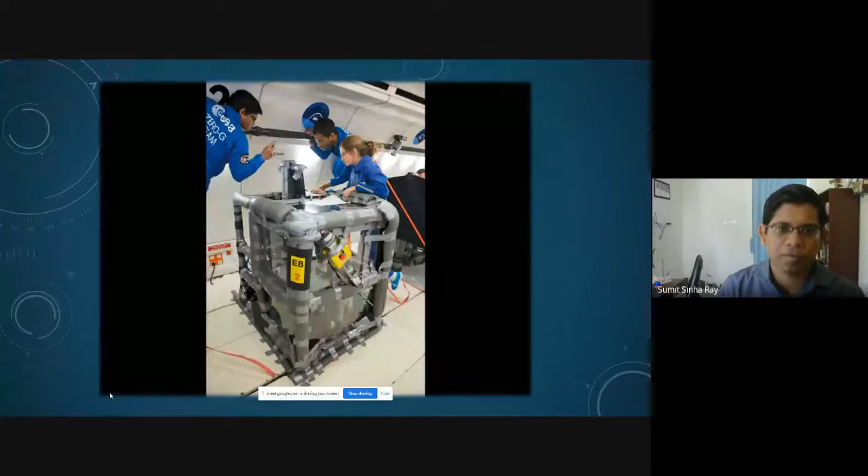So what happened on that day? Why are these people jumping in joy? Maybe some of their experiments were successful, some not. So I would like to take you quickly to that day, and slowly we'll build up on it. If I have to show it in a video, this is what happened. Nerds standing in front of an instrument flying, as you can see, a giant big instrument, a 0G flight, and me wearing a jumpsuit. But wait a second, how did that happen? Let me take you back to the flashback.

This is what a 0G parabolic flight actually looks like. It's not real 0G, it's about 1.8 microgravity, and before that you have hypergravity of 1.8 G. A plane like this Airbus A310 flies straight for several kilometers at 820 km per hour at 6,000 meters, then goes up for about 20 seconds with a 50-degree nose up, reaching about 8,000 meters, and at about 685 km per hour they reduce their acceleration and reach weightlessness, or 1.8 microgravity. For about 22 seconds they stay like that, and they come down at 1.8 G once again.

So for about 20 seconds, you will feel almost double your weight. If you try to walk, it will be very difficult. You won't be able to take a proper step, and you would feel your heart pumping hard to push blood all the way to your brain. Then for about 22 seconds, you will feel weightless. You will fly around, do all the different things you want to do, and then right away you will be kicked into hypergravity again. Then there will be a flat flight in one gravity for a few seconds.

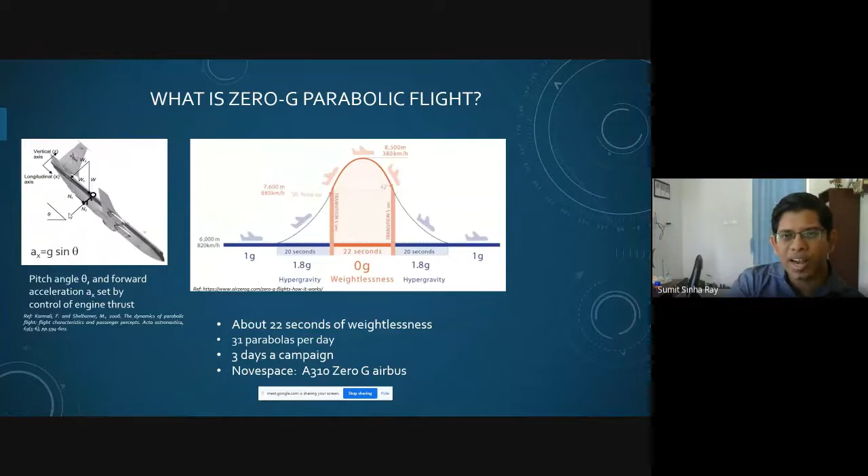And luckily for me, that was the day when most of the data were actually collected in our experiment. Well, if I have to think about what the physics is, I'll leave it up to the students of this esteemed department to calculate from this problem, which is shown on the left. Now, if I have to show you what it actually feels like in this entire parabola, I have a small video for that. So this is what is happening at 2 gravity or 1.8 gravity.

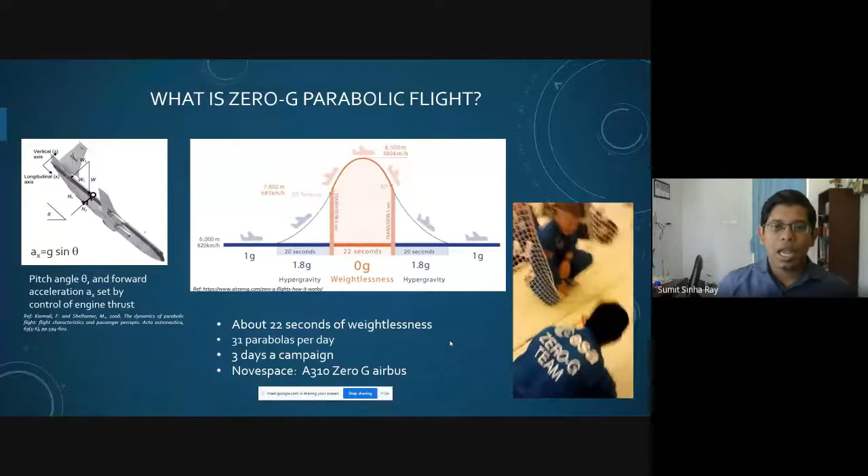So this guy Vladimir, he's now a part of ISS. I used to weigh like 90 kg then, but for me, the difficulty was that I was trying to push about 100 kg up. So this is where I am right now. So this is like the last. I am done, and then again it came to 0 gravity, and I just flew up. I wasn't there anymore. I could not control my body. So this is how it actually felt.

Now, when you are already inside, you don't feel like doing experiments, but we were bound to do experiments. We spent more than 100,000 euros for just these 3 days of experimentation, so we had to do some experiments. I will come to that. The question is, why do we need these flights? Apart from fun like this, there are many Hollywood TV serials that have availed these flights, and a lot of movies. So apart from recreational purposes, these 0 gravity flights have much to offer, because they are the practice ground. They are the tutorials for all these astronauts.

They go up to ISS, and when they go to ISS they have to stay weightless all the time, so they have to be trained in a simulated condition like that. One condition is them working inside a pool of water, so that they can strengthen their muscles and get the sense of time, etc. But to actually feel weightlessness, they can either go to a drop tower or they can use these flights. These flights give much more time than a drop tower, and hence they prefer these.

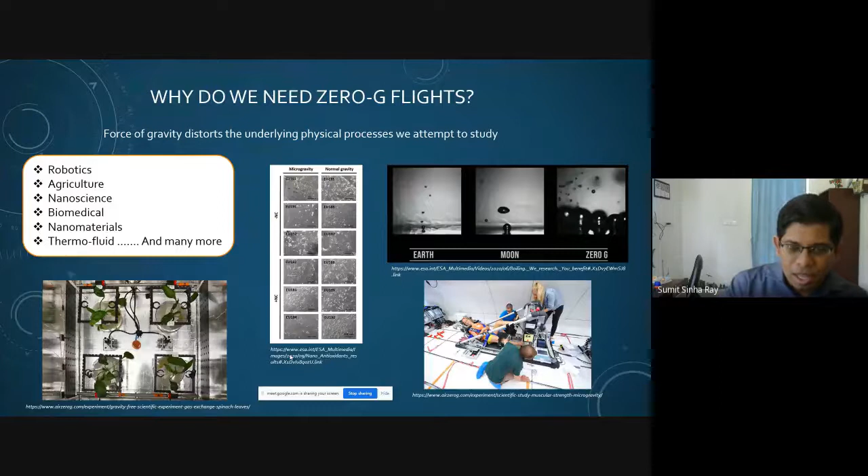Well, so now if I have to talk about the D-Day, what happened on that day. So now I give you the prelude of why we wanted to study in a parabolic flight. The basics is that my advisor, Professor Alexander Yarin, had a project from NASA, and he wanted to study the effect of nanotextured surface for enhancement of boiling heat transfer. And he had a partner from TU Darmstadt. His name was Professor Cameron Tropea, along with Peter Stephan. So they cooked up a project, and they somehow managed to get into this European Space Agency parabolic flight.

So in the month of March, when I was preparing these nanotextured surfaces, my brother, Dr. Suman Sinha Ray, who was also in this lab at the time, he was running the heat transfer experiments, and he knew what was going to happen. Somehow I had no idea. I was mostly invested in developing the surface, which can actually help in maximum heat transfer. I got a call from my advisor. I went to his office. Suman was there, and he suddenly, in his heavy Russian accent, told me, "Sumit, you are going to Germany and then France, and you are going to zero gravity flight."

And I was shell shocked. I was stunned, and I was happy, elated, everything, but had a lot of fear, because I was just 1 year then in that lab. Within a year, getting that kind of opportunity was huge for me. I gladly accepted it, managed a visa, flew to Darmstadt, spent there a couple of days perfecting the instrument, and then drove about 1,200 kilometers to Bordeaux. It's a heritage city in France, and we were there for about 10 days, 7 days of pre-experimentation and 3 days of experiments.

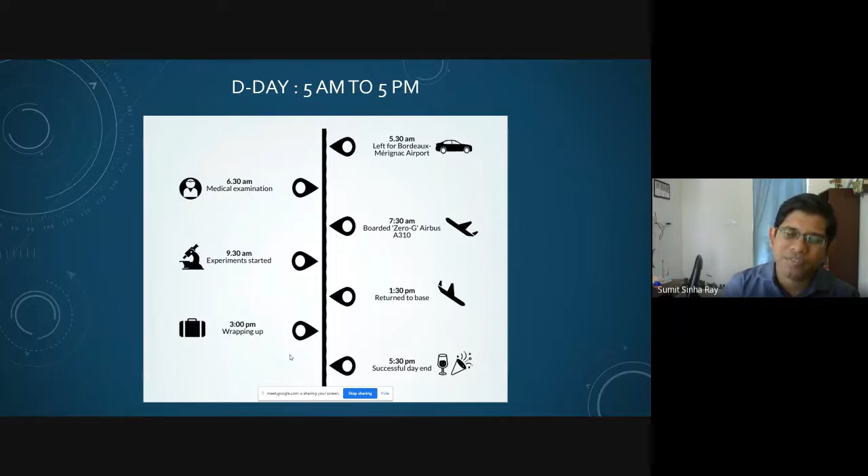At about 1:30 to 2 p.m., we came back. By that time, due to over-chewing a couple of chewing gums, my jaws were hurting badly. But then one of the German guys gave me a French baguette. And a French baguette is the kind of bread you can take into a sketchy neighborhood and beat anyone up with. So it took me about an hour and a half to chew on that baguette and finish it.

After that, it took about an hour to wrap up everything. And by 5:30, we were back at our villa in the Bordeaux main area, and we partied hard. Well, we got the maximum data on that day, and this was our day. And we were really happy because out of the 12 groups there, only 2 could publish their data, and most of the data came on that day.

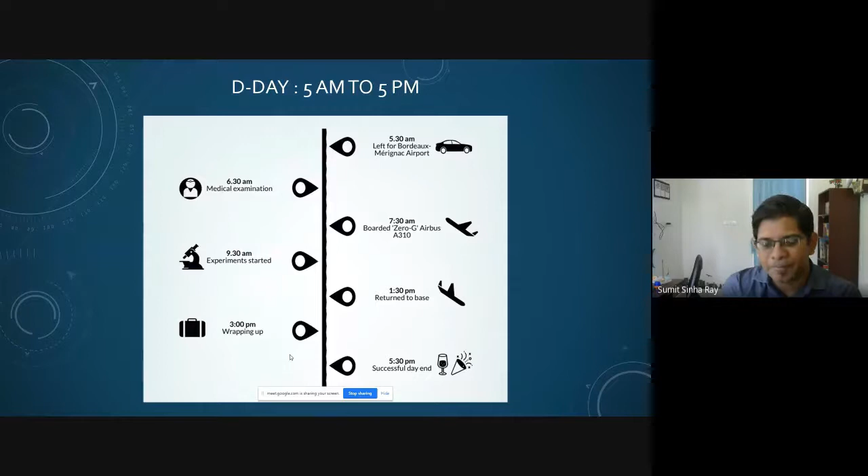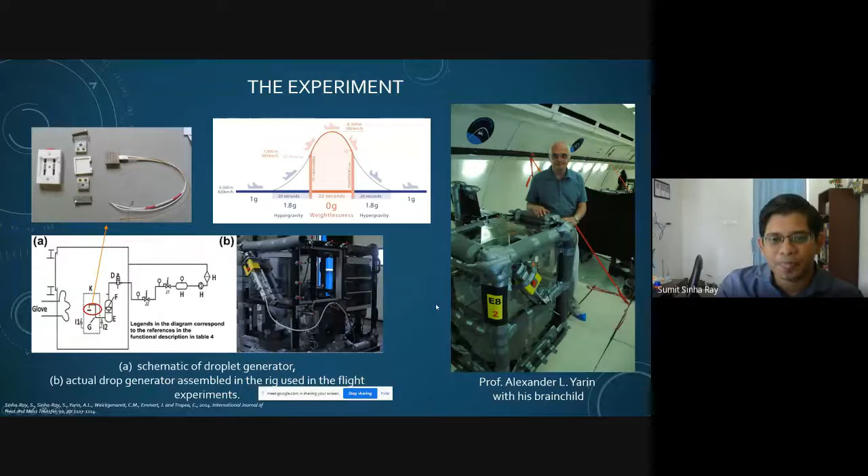So this is what happened during the experiment. So these are small videos. There were a lot of decision makings that happened during the experimentation, and there was one small funny weird thing that happened, and you may end up laughing at the end as well. So this was one incident.

So in the background, as I run this video, if you're able to hear, what happened when you are getting into this 1.8 gravity, they say pull up. So that means they are going up now, and then they will say 30, 40, and then injection. That means that goes into this zero gravity, and then they will say pull out. That means now they are pulling out from the parabolic, the zero gravity area, and then twice gravity starts again. And you could see immediately people reacting to that.

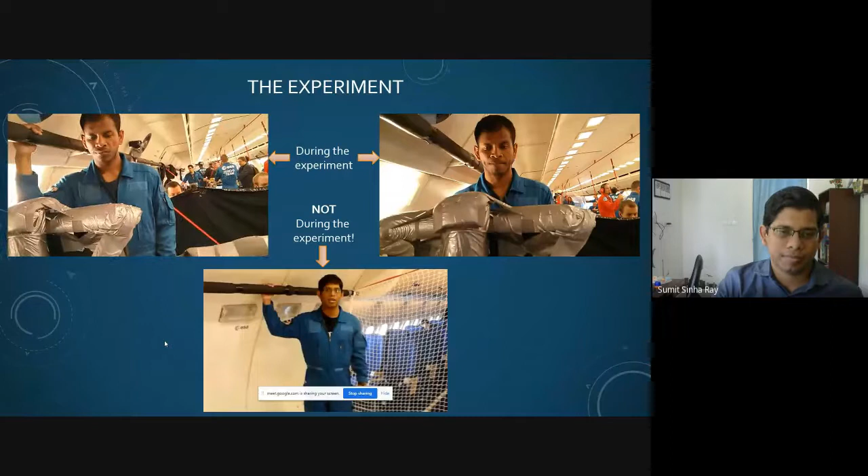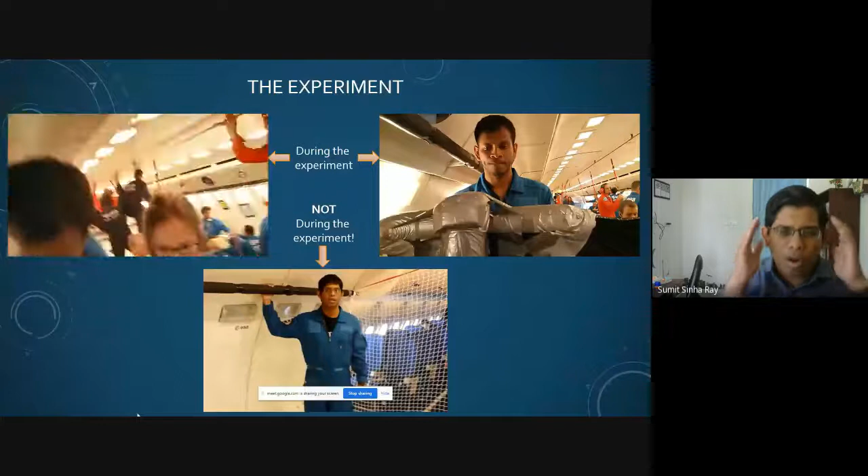So he said pull up. Now you will hear 40 and 30. And you heard injection, and you hear this hissing sound at the back. Everybody is flying right now. So now the decision making is when to turn on the compressor, when to generate that drop, at what frames we should be choosing to understand that. Now you hear in the back 30, 40, and then pull out.

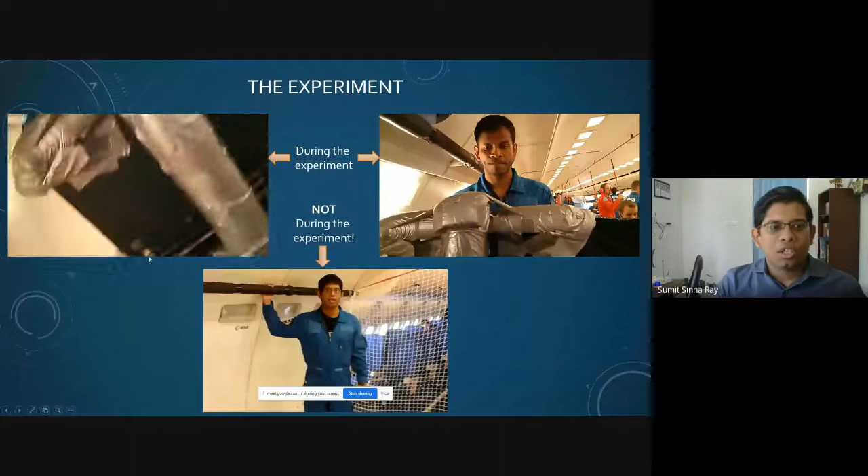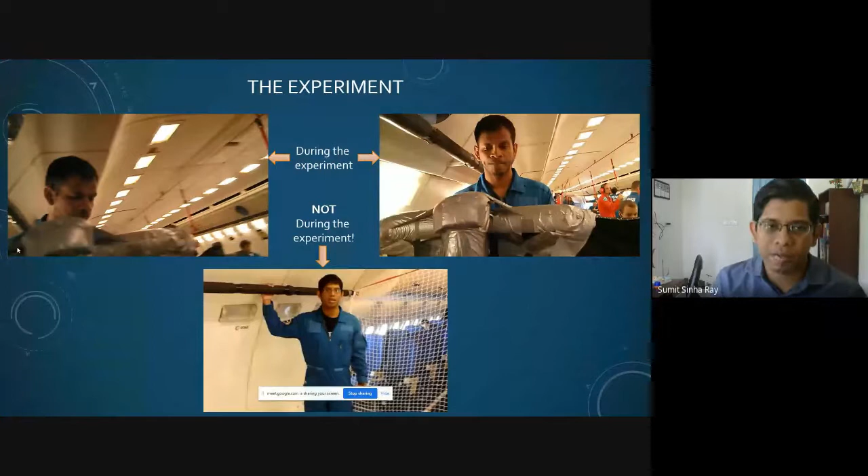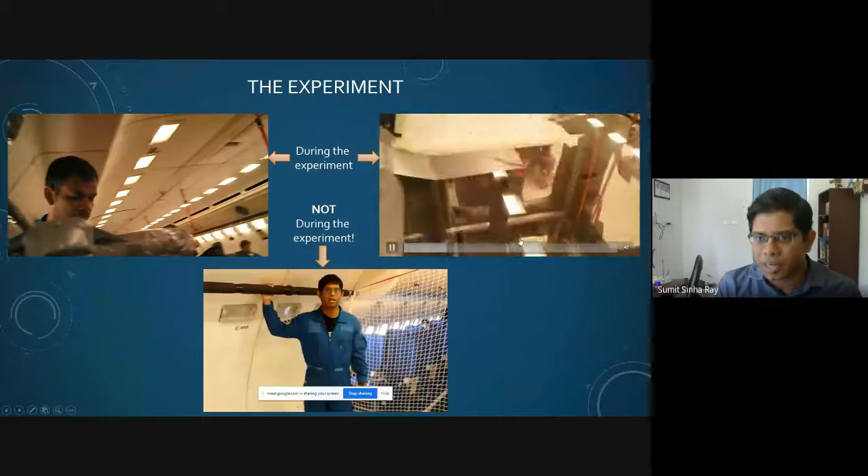So this is the time actually in this video, you see me taking a video from below, because I fell down and I could not get up in hypergravity. So I could just raise my hand a little bit, and I was filming that video. So this is one of the other incidents where I actually kicked a Japanese professor at the time. So this is the compressor over here, and this is the droplet generator. So again, these decision makings and everything over there.

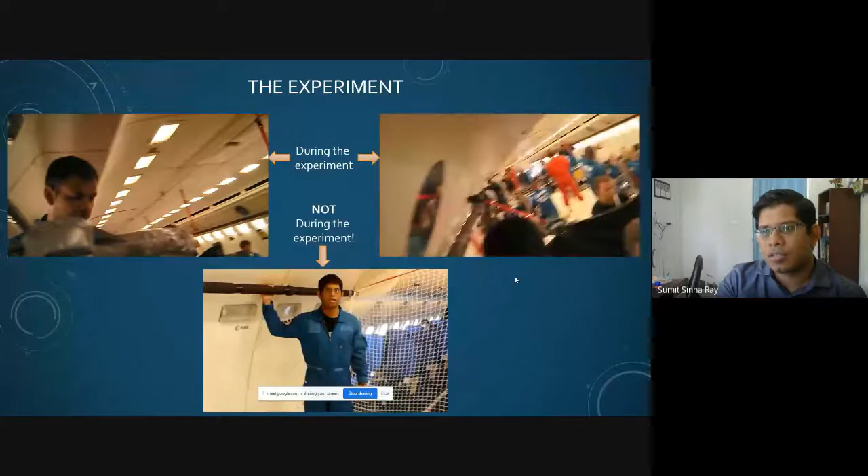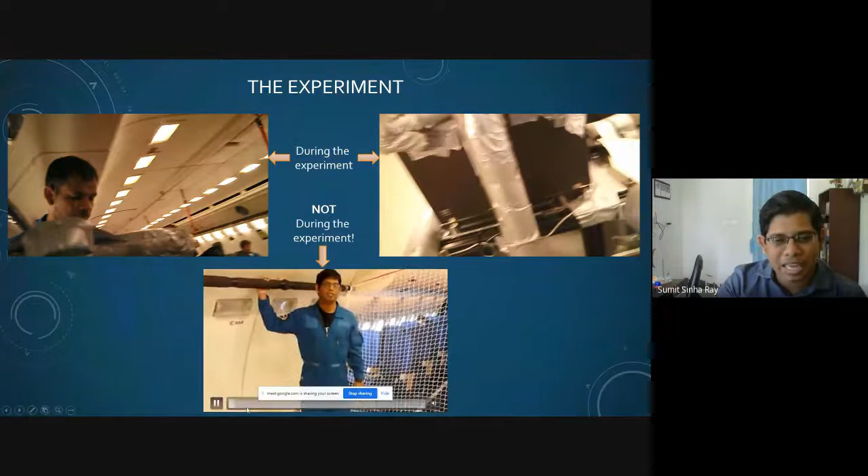And this is where I decided to have a little bit of fun. So you can see this guy, just standing upside down. And I beg your pardon for this part, but these are all firsts for me. Well, that felt like a flying duck. Well, when we were not doing the experiment, I'll just skip a little bit to that. So this was one of the very few last cycles when we were allowed to go to the back and have a little bit of fun.

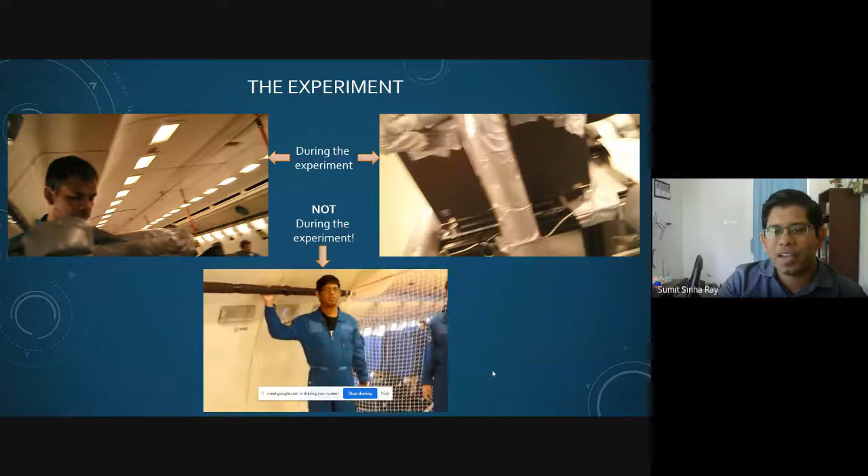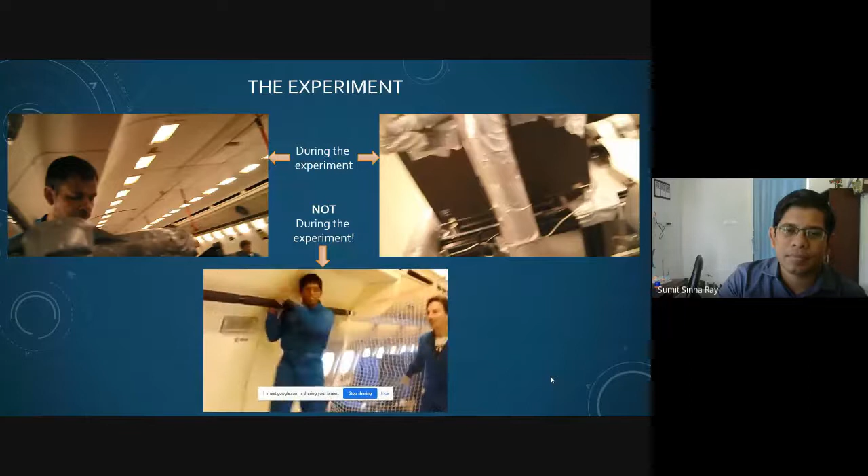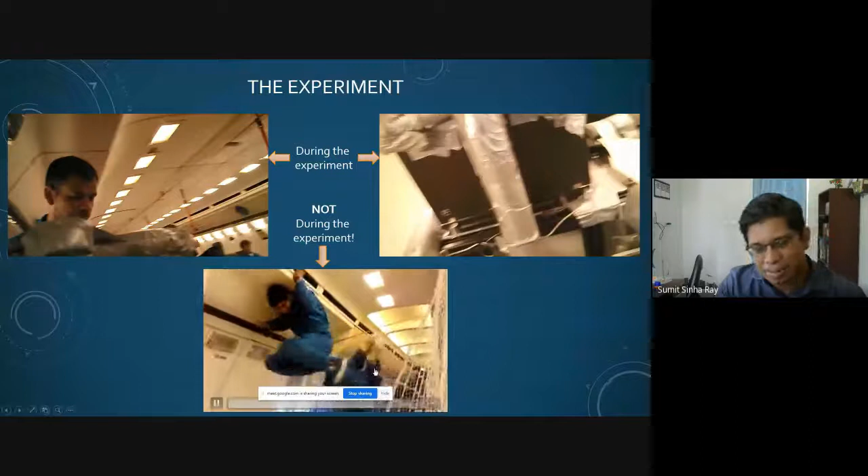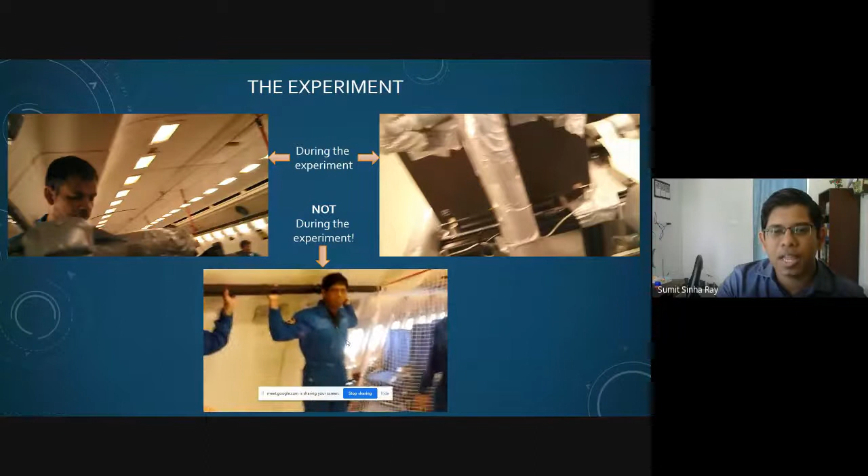For a very brief microsecond, you could actually feel that you won't be able to control your body. So this guy at the back, he was already doing it a couple of days, so he was more or less familiar with it. I was afraid, so I was holding on to this rod. And now then the pull-out comes, and we have to get to a point where we should not move that much. Also, if you try to move, this will hamper your motor stability as well.

Okay, so now coming to the business end. What did we study? Well, we actually studied spray cooling of high-power microelectronics in zero gravity. As Professor Sen was mentioning, a lot of discussions happened on cooking. So I was a little bit of a cooking enthusiast at one point of time before I got married. Those who cook, and those who don't but see them, would see that if your frying pan is really hot and you try to put one droplet of water onto the surface, the droplet runs away from the surface.

That phenomenon is what we call the Leidenfrost phenomenon. That is the point of minimum heat transfer in the boiling regime. That happens because the evaporation takes place so quickly that the majority of the droplet sits on a vapor pillow and hovers on it. And wherever the pressure is less, it moves in that direction and leaves the surface. What we wanted to study is, can we reverse this phenomenon?

So in these two cases, individual droplets could hit onto the surface. This was a smooth bare copper surface, and this was a nanotextured surface, and we could actually see that in the second case, we could remove double the heat from it, despite the fact that it was all in zero gravity.

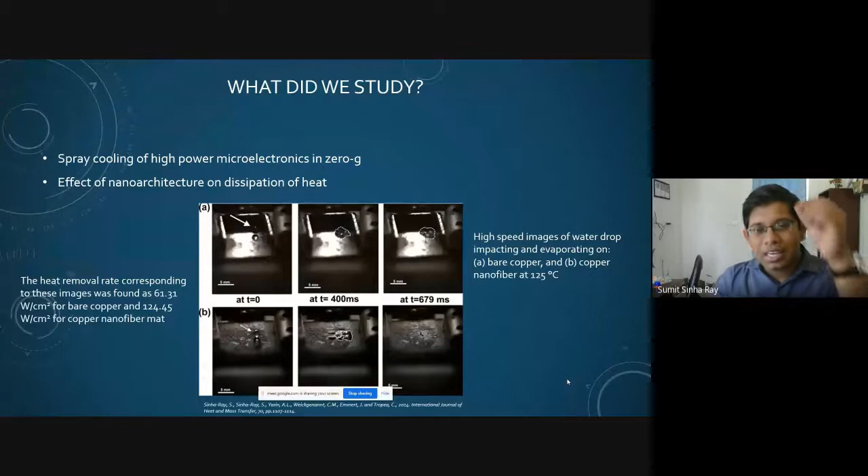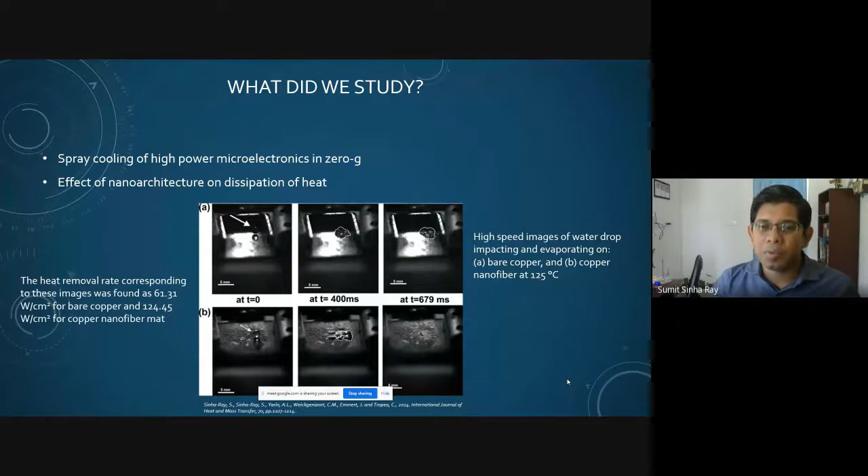So taking the droplet, reaching it onto the surface was the most difficult part. And not only that, reaching to the surface and pinning onto the surface, which was otherwise difficult anyway due to very high temperature, shows the efficacy of that surface itself.

Now, the question is, why is this happening, and why suddenly we want to invest so much of time in studying these heat transfer phenomena? The reason was, our motivation was for microelectronics cooling. So now if you see these pictures over here, every one of us likes the idea of automation. Just think about it. There are about 80-90 candidates who are seeing it. All this data that we are generating is being processed somewhere else.

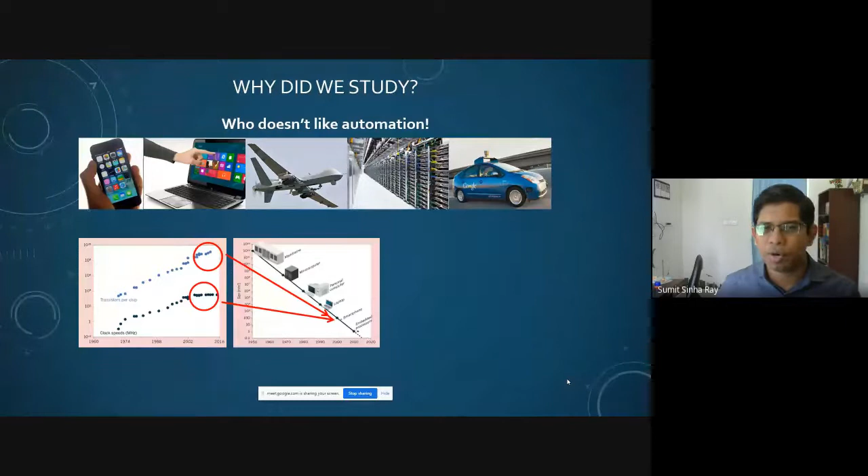And not only our data, in that somewhere, in that shaded area, which is running under air conditioning, etc., billions and billions of people's data is processing. So when you process that much of data, you run a small computer, you play a little bit of game on your laptop, and you see how hot that laptop gets. Your cell phone gets hot so much. We like these automation. So just think about when billions of data is processing, the amount of heat that can be generated is drastic as well.

Just think about a UAV which has to fire a missile, and that contains a lot of microelectronics. And in that, there will be a lot of power electronics which would be generating temperature as much as 140, 150 degrees centigrade inside the component. And that heat has to be dissipated out as well.

Well, the problem in the modern world is that we are increasing the number of transistors every now and then, but our clock speed is somewhat limited. That means the calculation that we can do is somewhat limited at the speed of it. But we are all doing it at the smartphone level. By 2016 itself, we are at a smartphone level. So that many billions of transistors in an integrated circuit produces a tremendous amount of heat.

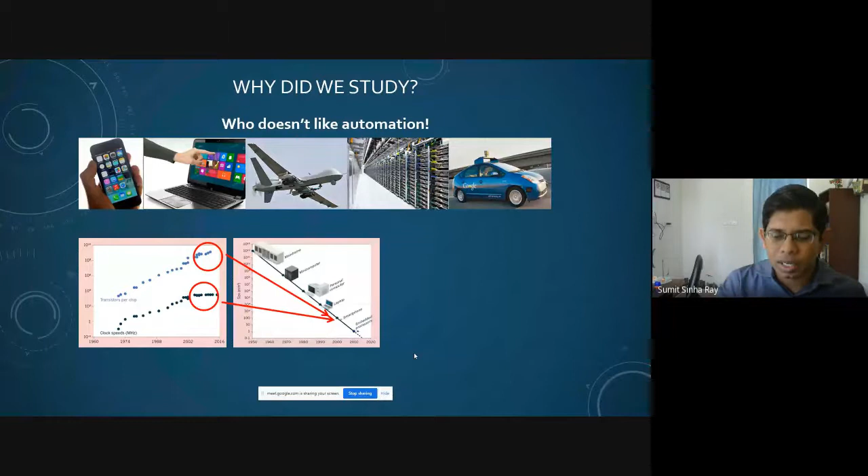But processors have gotten smaller. Every now and then we need a light, compact laptop without a bulky fan inside. And then heat transfer has to be efficient. There is a certain thing called TDP, thermal design power, which actually shows how much heat can be dissipated. Your regular i5, i7 laptops are rated for about 90 watts. A gaming laptop can well go up to 300 watts of heat that needs to be dissipated.

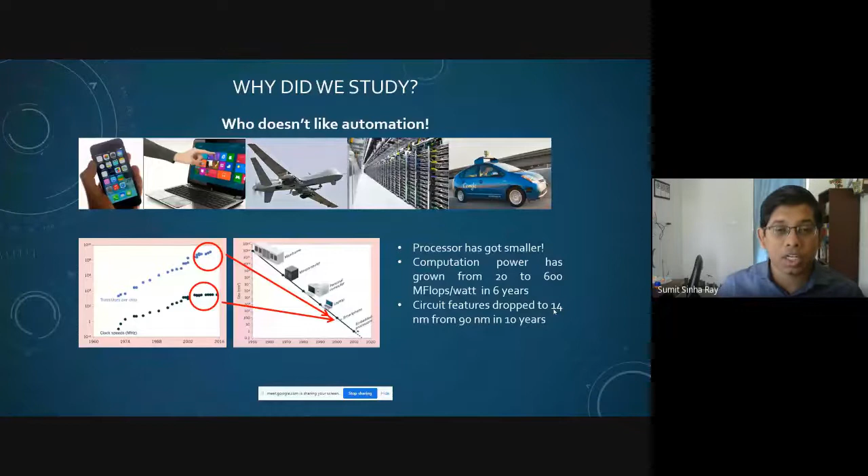Now, with a simple fan, this amount of heat cannot be dissipated, especially given the fact that these modern day computers have circuit features which are not only just 10, 14 nanometer. These days, these are 10 and 7 nanometer, and very soon we would be getting 4 nanometer. So which means they are much more compact and producing a large amount of heat, and that has huge implication on your battery.

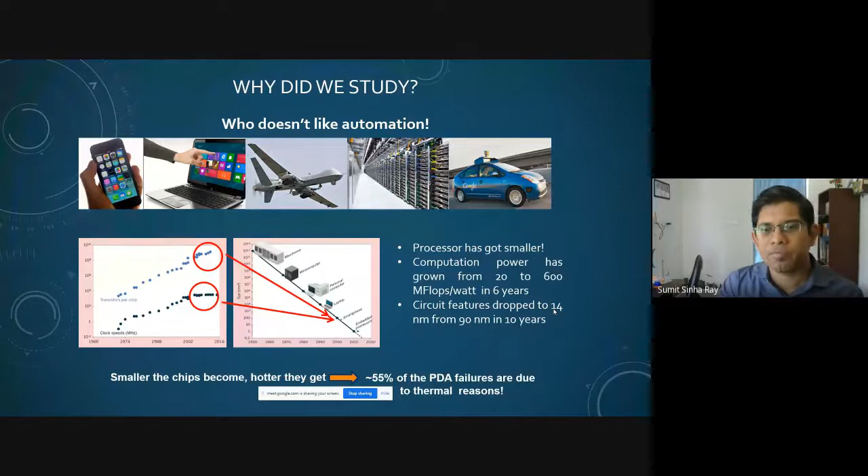These microelectronics consume as much as 4% of the net electricity that is required in any country. So the smaller the chips, the hotter they get, just simply because of Joule's law of heating, and the majority of the PDAs fail because of this thermal reason. And this is one of the reasons why people assume liquid cooling is one of the best possible cooling techniques, where they just take the entire rack of the GPU, put it inside liquid and let the liquid boil off and take the heat out.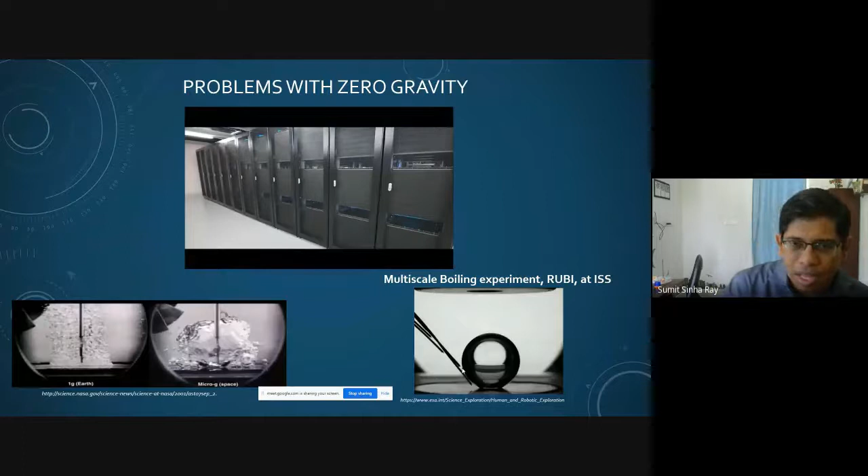Now, our solution in this matter was that not the entire microelectronics is hot, right? So they have the hot spot.

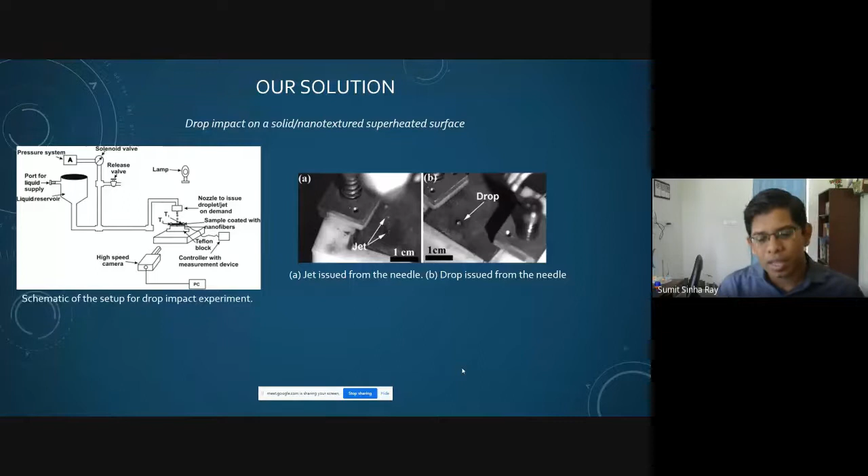So what if we issue a single droplet onto the surface and allow it to boil on the surface, but the most important question was to stick onto the substrate, and then just cool that area. And once one droplet evaporates, the next droplet will come, or we can have a jet onto the surface, and in that sense, the net heat removal in terms of watt per centimeter square would be much higher. So in this regard, my job was to develop these kind of surfaces.

Okay, so the idea was that you have this GPU, you place a copper plate onto the hot spot, where the copper plate would be textured like this. These are what we call metal plated electrospun polymer nanofibers. Earlier in one of our studies, we had shown that these electrospun polymer nanofibers can reverse the Leidenfrost effect by wicking the droplet inside the surface when the droplet is coming with a certain velocity and it hits the surface. So as it hits the surface, it goes inside, wicks it, and cannot come out. And once it tries to come out, it chops the bubbles as they try to come out.

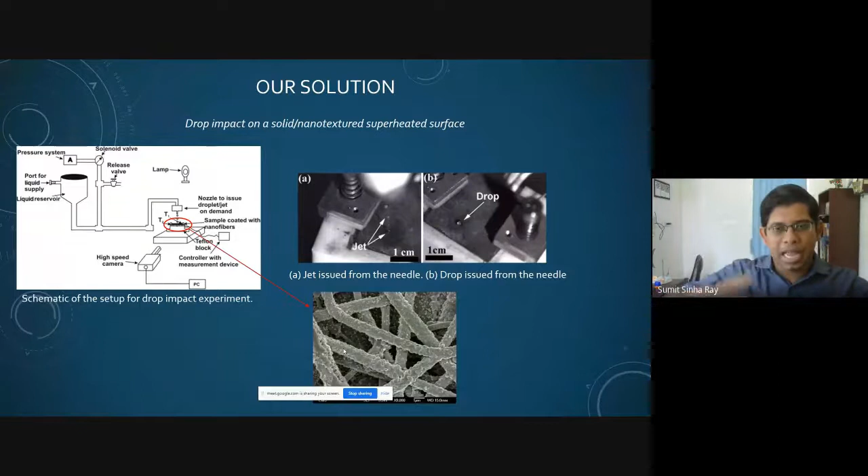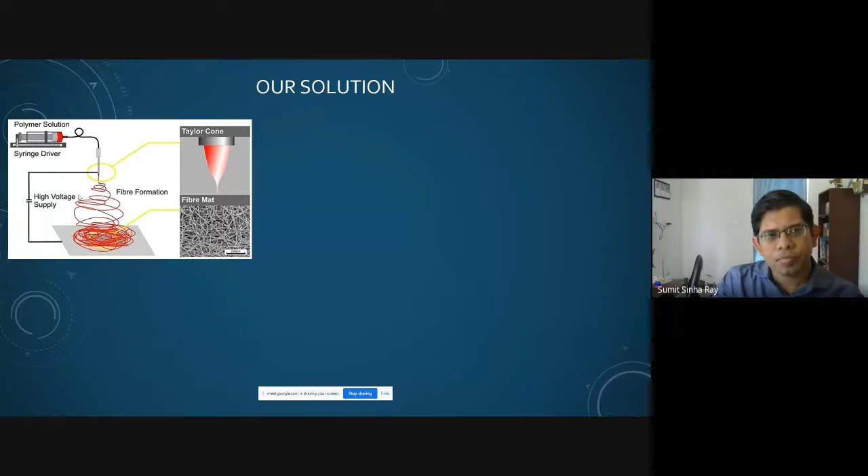The question is how to easily manufacture this. One of the easier solutions of doing it is by electrospinning. If you are interested, I can explain the phenomenon of electrospinning in detail. However, the basic detail over here is that there's a polymer solution that is being pumped through a needle, and this needle and the collector are electrically connected with a very high voltage supply of about 10 kilovolt. And the polymer solution, when it comes out from the needle, gets attracted, overcomes its surface tension, and gets pulled out as a viscoelastic jet. And that jet over time solidifies and goes through several bending instabilities, and it gets collected as fibers.

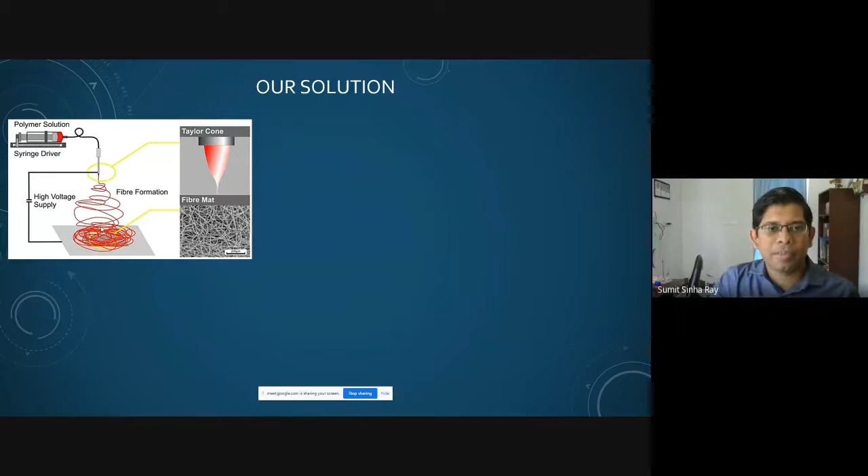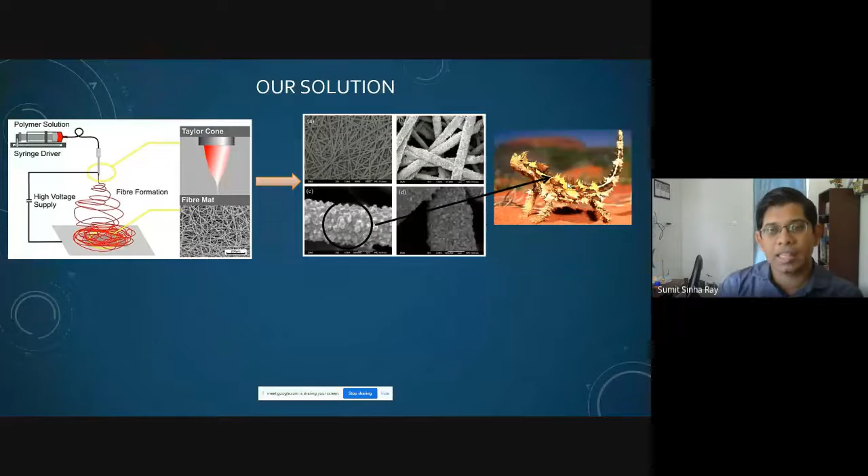Okay, and these dry polymer fibers are then metal plated, so this is just the age-old simple electroplating technique. The only way is to tweak the structure in such a way that it mimics a kind of thorny devil structure. So these thorny devils, they are called dragons practically, but they are not. These are lizards which have these spikes on their back, and these spikes actually help them to get the moisture from air, from arid atmosphere. So these spikes are hydrophilic in nature, and they allow nucleation happening on them.

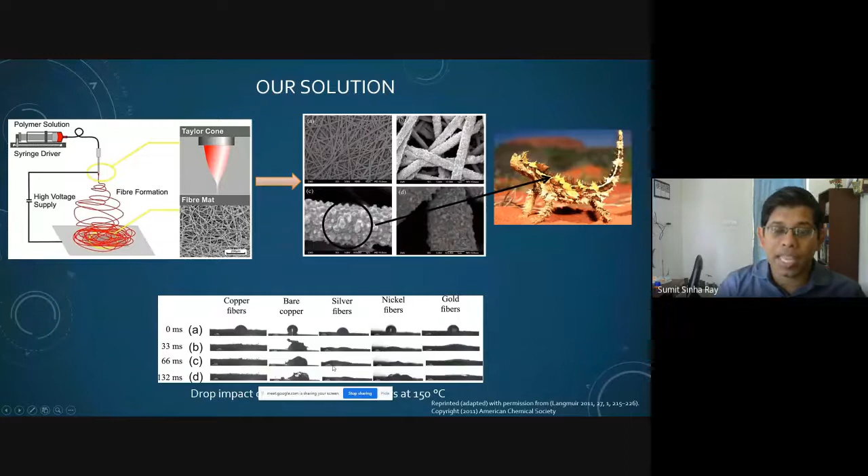So the same structure was tried to be mimicked over here, and in normal gravity condition, when we tested at 150 degrees centigrade on bare copper surface, the droplets tend to splash, and they tend to make these different kinds of bag formations on the surface in the Leidenfrost regime. The nanofiber surface with metal plating actually allows wicking and enhanced heat removal.

Well, so during our experiment, we had these two conditions. As you can see over here, this is in 1.8 gravity, when droplets were coming like a jet, and we had a heat removal rate of about 128. However, in zero gravity, we could remove about 190 watt per centimeter square. And you can see that in this entire situation it was very difficult to issue one droplet on a particular spot, and that is one of the reasons why some of the drops came at different locations as well.

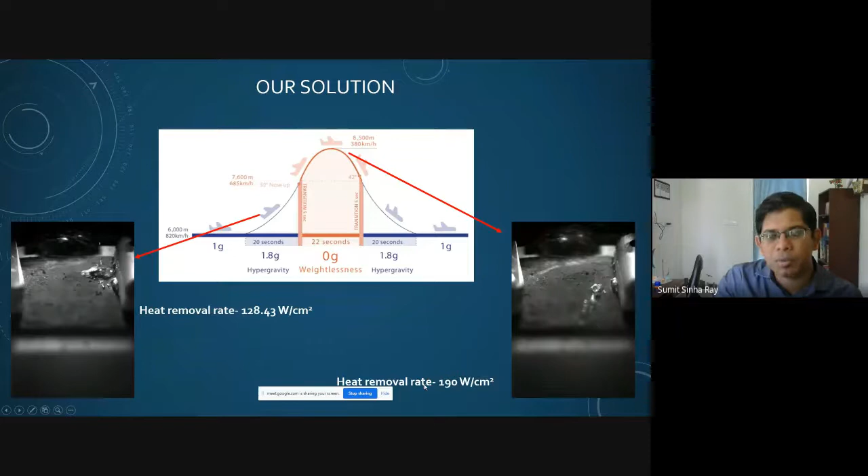While studying it with a high-speed camera, you can see how this is boiling, and it's not leaving the surface anymore, and it has been pinned onto it. It is not bouncing back and flying away. And in ground condition, we could remove all the way up to 600 watt per centimeter square. In zero gravity condition, we could remove about 190 watt per centimeter square, and that is one of the highest data that has been obtained for zero gravity conditions. So this is what we did during our experiment.

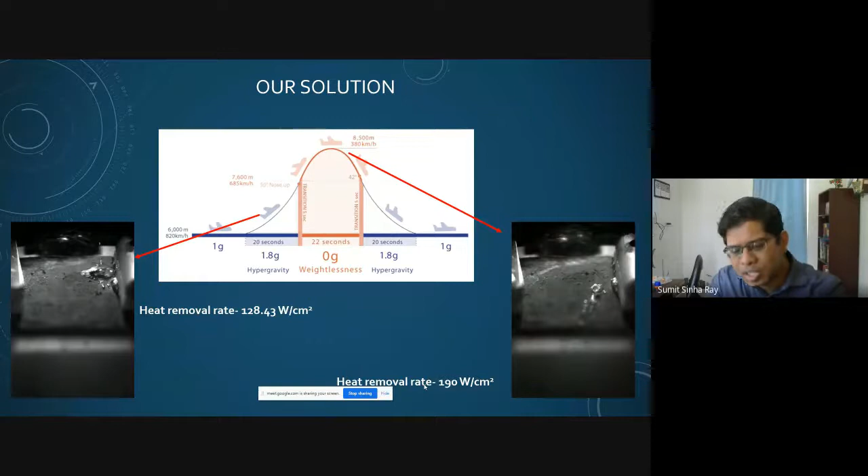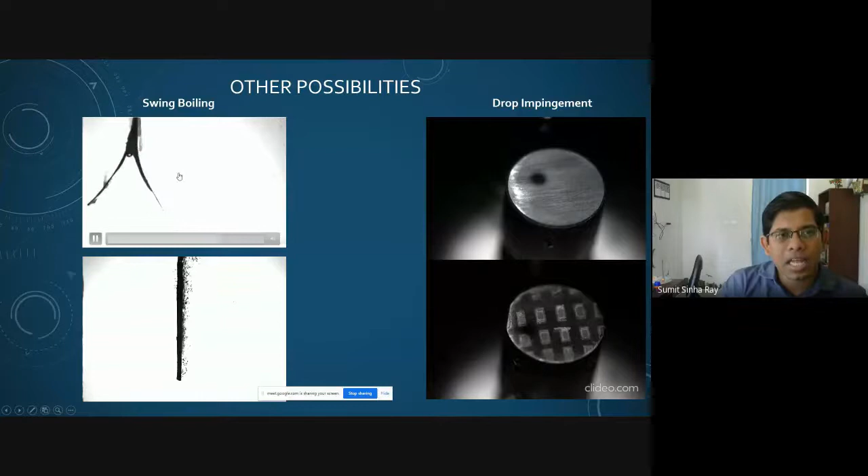Now the question is, what else can be there? Okay, so there are many other things that can be studied. This is what we have been trying to do at IIT Mandi in our lab. This is one experiment, what we call swing boiling. So since the bubble has to leave vertically for buoyancy to take place, we had this condition where the bubble is leaving from the surface normal to it, and hence buoyancy does not play any role. This is a self-actuating motion governed by the nanotextured surface on a particular heater, which is turning on and off as it gets hot and cold, and then it swings, moves into the liquid, and kind of dissolves all the bubbles that have formed, and then delays the vapor layer formation that generally happens in zero gravity.

This is a similar kind of experiment. You can see the bubbles are leaving from this side, and it is moving towards the other side. Now it has switched the polarity, and it is moving in this direction with a vigorous bubbling. This bubbling was enhanced by the presence of this nanofiber texture.

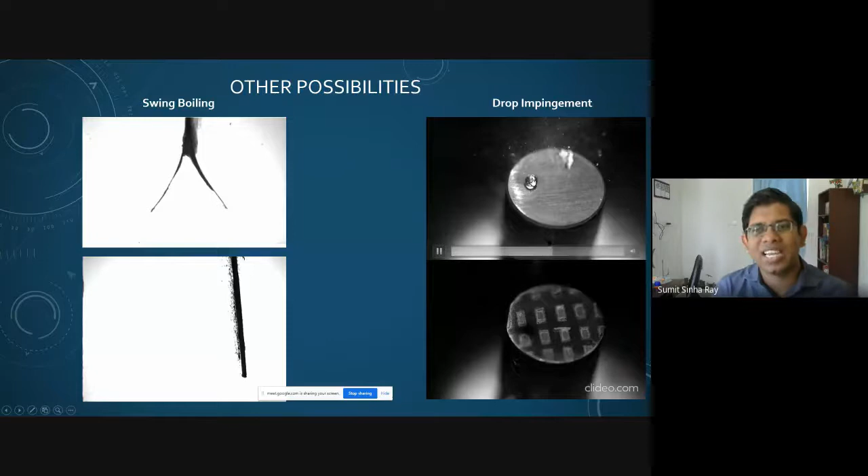Now, at the same time, if I show you this video, this high-speed imaging, this is a superheated substrate where an ethanol drop was hitting, and you can see that it kind of spreads out, boils immediately, and then there is a lot of atomization that is happening, and then eventually they form a couple of these big droplets, and these droplets over here tend to run away from the surface, and this droplet stays as it is. It is not changing its volume at all, and it is trying to go towards the edge where it can leave.

On the other hand, if we have a textured sample like this, where we mimic all these cold and hot spots, and we put this texturing on it, and I'll just skip a little bit, you see that these droplets over here, where earlier these droplets had left, got pinned, and they cannot leave the surface anymore. Thereby, we use the entire potential of this nanotexturing in terms of heat removal. So these portions have been boiled, and this droplet cannot leave the surface anymore.

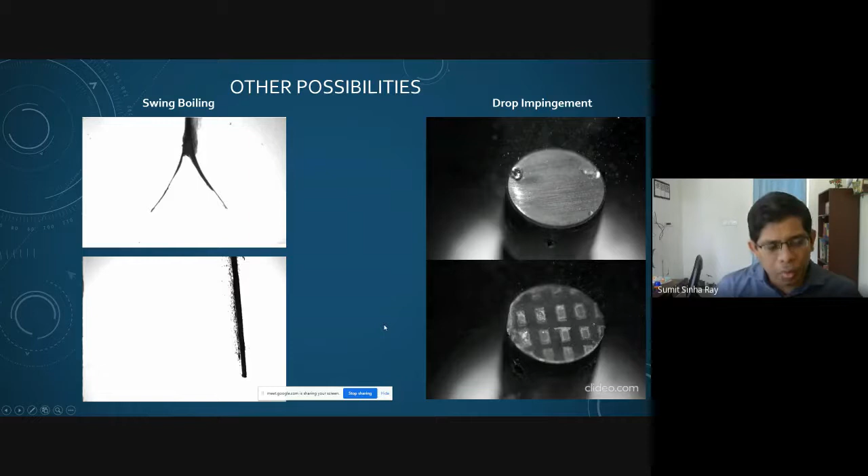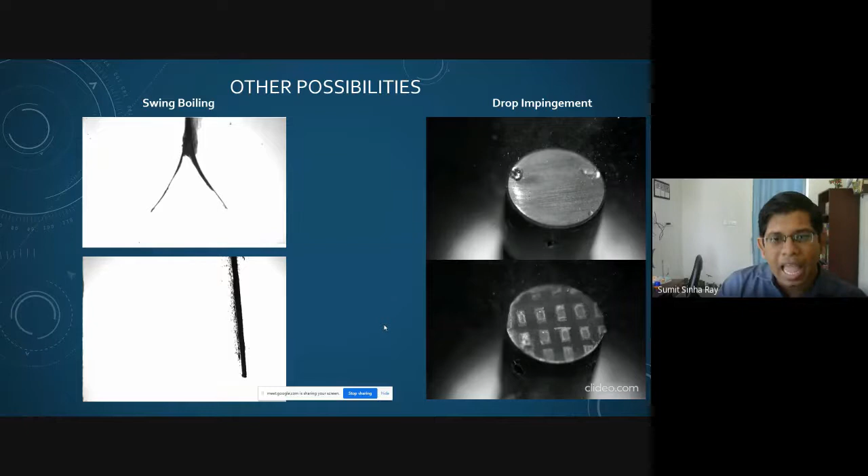So with this, I would end this presentation. There is no conclusion slide, because there is no conclusion to draw. Zero gravity experiments have a lot to offer, and as I have mentioned, these experiments are practically a pathway to the International Space Station, and I believe, with time, our students would derive inspiration out of these, and would be able to go beyond and do the experiments, and would make their own mark. And I hope that very soon in India we'll get to see these kind of experiments happening as well.

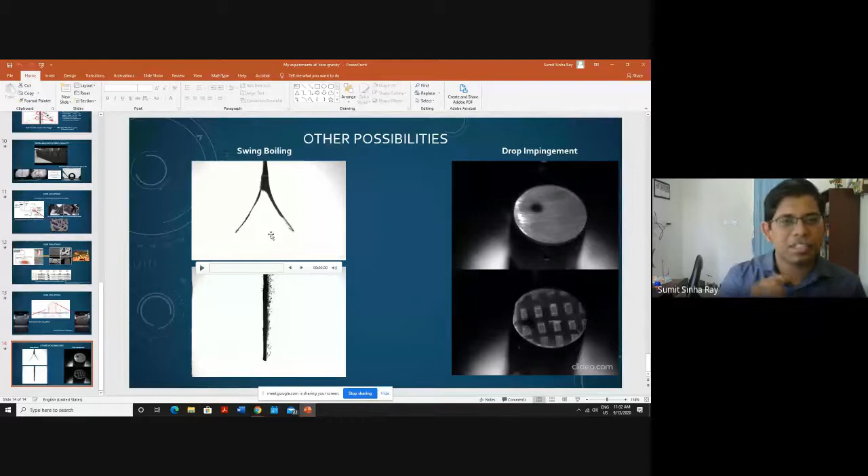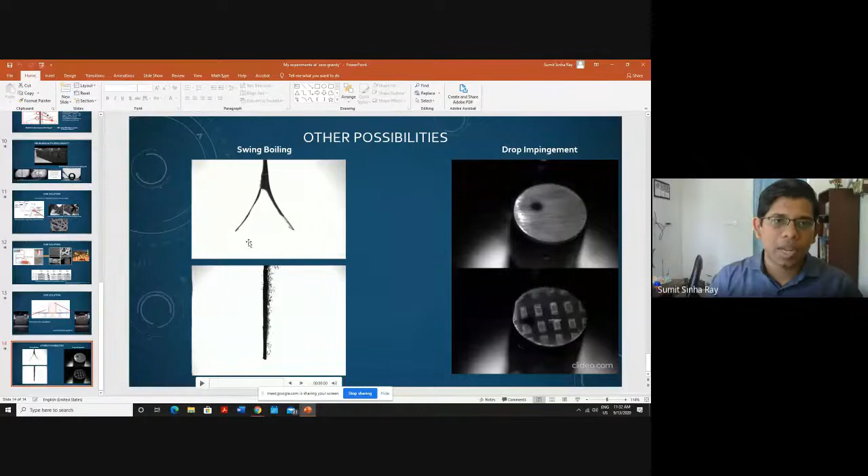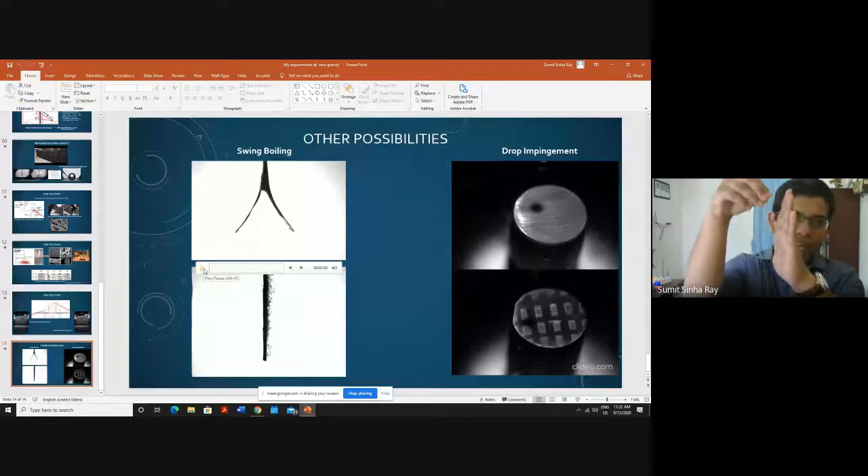It's quite a lot. And what we did, we had these two heaters sandwiched together, and we switched the heating polarity. So either we heated this surface or heated that surface. Once it was heated, the bubbles leaving the surface leave vertically first and then go up in gravity. If it was like this, they would just go normally up. But if that sample is kept vertically, then the bubble will always leave normal to the surface.

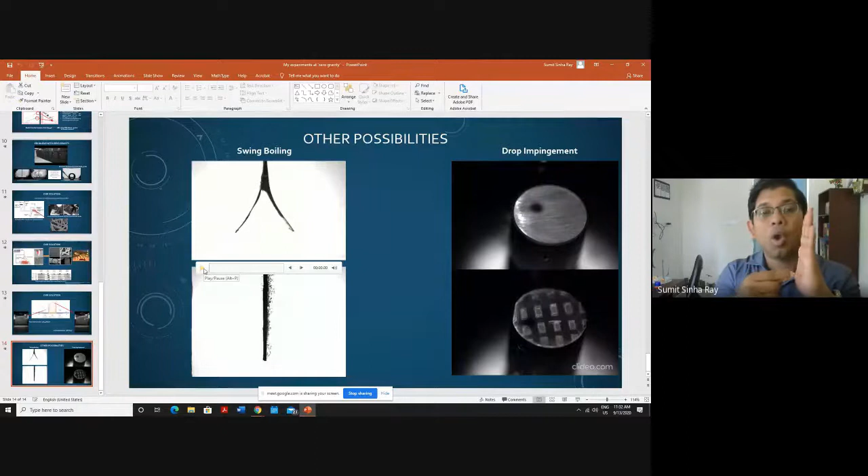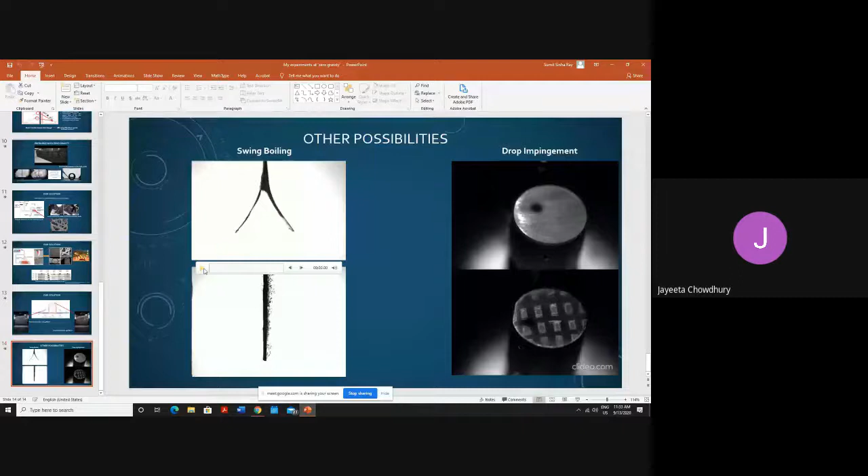Now, as it leaves normal to the surface, all these thousands of bubbles push the surface back. In zero gravity, the condition is that you have to remove the bubble. So what if the surface doesn't stay at its position? The surface tends to move back, and then automatically we end up mixing the liquid. That is what happened when we had boiling on this surface, the surface moved to the other side, and vice versa. So this was the underlying phenomenon for this case.

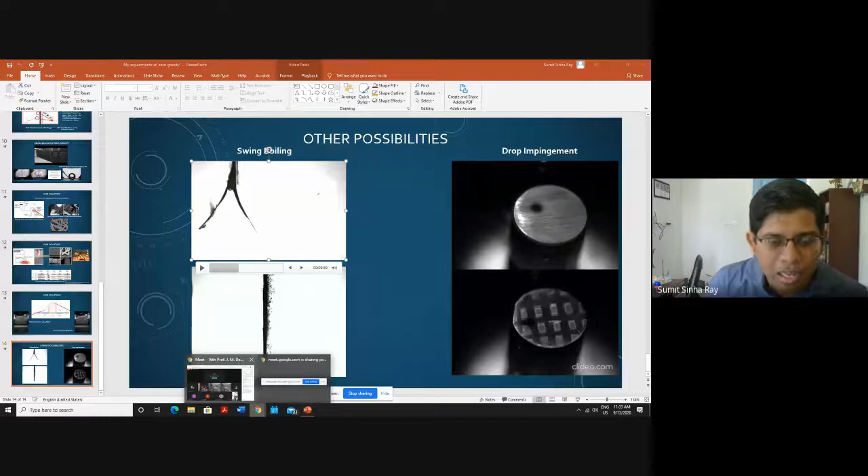So we actually got a velocity. I can very well share this paper with you. We actually realized that this has this pendulum kind of a motion, and our prediction was about several centimeters per second, which was at the same scale of the actual experiment. So I hope this answered Mr. Pathak's question.

Okay. Hello. Yes. Thank you, Mr. Sinha. Another question is there.

Dibbo asked what could be the most efficient local heat removal technique to be applied in finite gravity. Well, the thing is that there is no better technique than having phase change heat transfer, right? Suppose you have water and you are boiling it, just think about it. You can take several kilowatts per centimeter square of heat from the surface. That is the best possible technique.

The problem is that you cannot have water. You can try having double distilled deionized water, but that is still not possible because of some debris. Somewhere it will come and then it will short circuit it. So for these kinds of setups, people have tried to come up with fluorinert fluids like FC72. This is old, but new fluids are like Novec 7300 or Novec 7100. These do not affect the ozone layer. They're more or less bio-friendly, but they have less specific heat capacity and lower evaporation heat transfer.